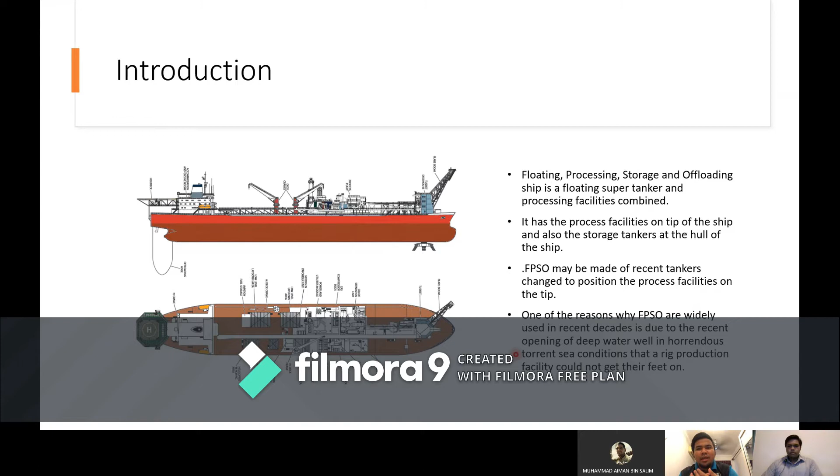One of the reasons why FPSO are widely used in recent decades is due to the recent opening of deep water wells in horrendous torrent sea conditions that a rig production facility could not get their feet on. So in the oil and gas industry, mostly floating production storage and offloading units were converted from single hull super tankers.

Besides that, at the LNG, which is liquefied natural gas logistic chain, where the natural gas is brought back to ambient temperature and pressure, a specially modified ship is used, which is FSRU.

So generally, there are four types of FPSO. The first one is FSO, which is floating storage and offloading. In this type of FPSO, which is FSO, it doesn't have any processing and production. It's just for storage and transportation.

Next is FPSO, which is floating production, storage, and offloading, primarily used in the offshore industry. Next is FDPSO, which is floating, drilling, production, storage, and offloading, in which this type of FPSO has a drilling process. Last but not least is FSRU, floating storage regasification unit.

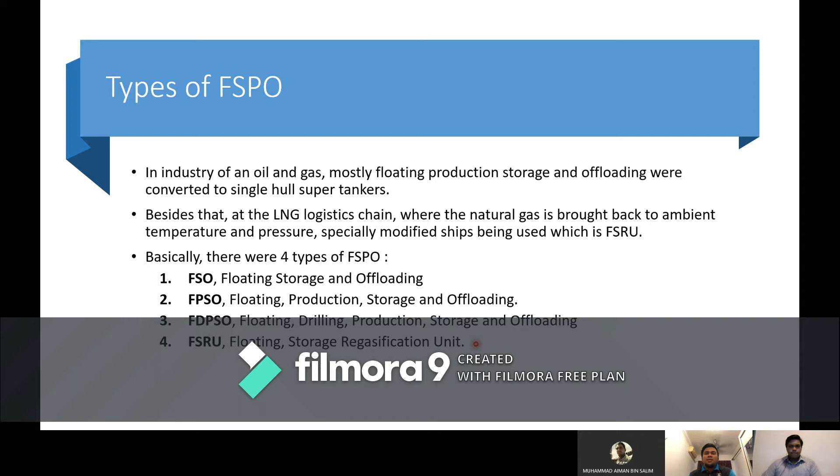So for the FSO, it involves accumulation and storage of oil and gas at sea, as a secondary method of oil and gas transportation and storage, exporting to shore by pipeline or shuttle tankers.

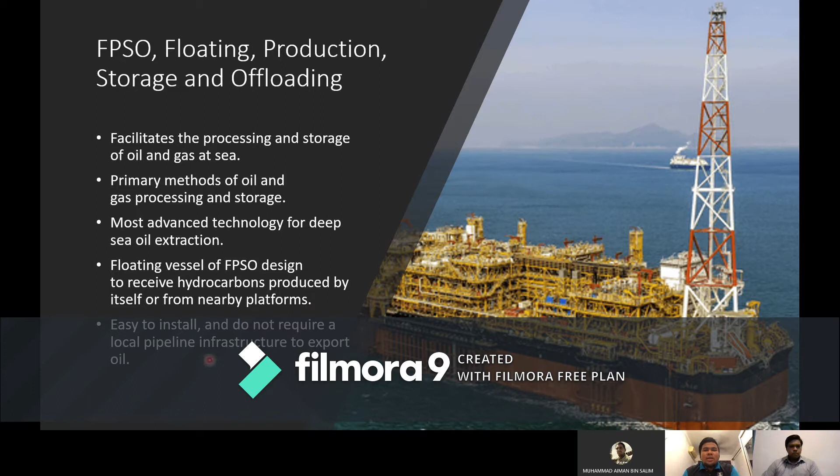For the FPSO, it facilitates the processing and storage of oil and gas at sea, as a primary method of oil and gas processing and storage, using the most advanced technology for deep sea oil extraction. The floating vessel FPSO is designed to receive hydrocarbons produced by itself or from nearby platforms. It's easy to install and does not require local pipeline infrastructure to export oil.

For the FDPSO, the vessel is modified with a modular drill attached to the hull of the ship. Addition of the drilling process allows it to perform nearly all major functions associated with offshore oil and gas production.

Last but not least is the FSRU, a vital component required while transiting and transferring liquefied natural gas, LNG, through oceanic channels. It is a special type of ship used for LNG transfer.

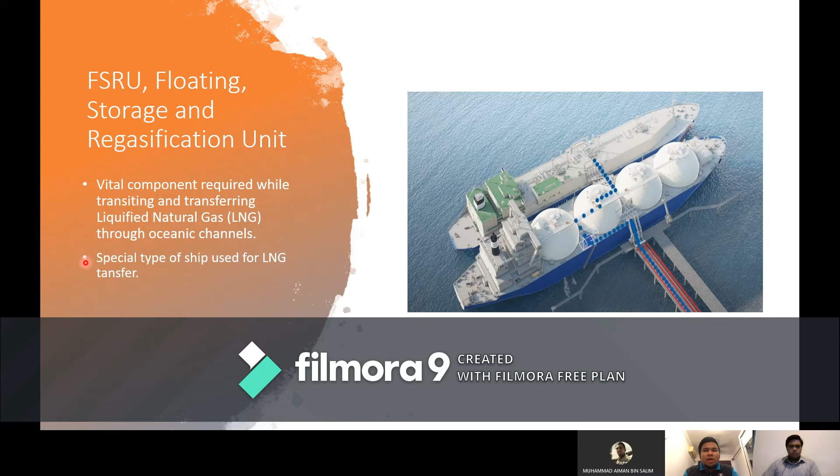We're going next to FPSO in Malaysia. Basically, there are several companies that apply the FPSO concept in Malaysia, one of which is FPSO Ventures Sdn Bhd. Generally, these are the FPSOs in Malaysia.

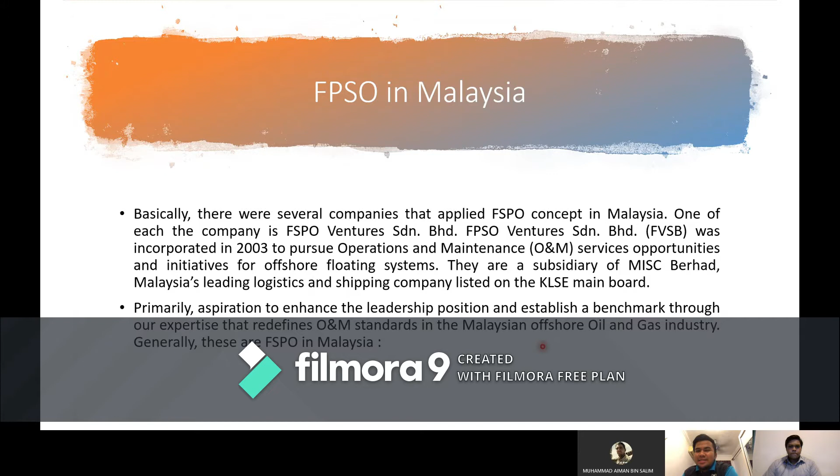The first one is FPSO Kikeh at South China Sea. These are the characteristics and specifications for the ship: weight is 81,000 tons, area 350,000 cubic meters, volume hold capacity 574,560 cubic meters. The process on the FPSO produces the desired product of 2.2 million barrels a year. Manufacture year is May 2013. Location of the ship is South China Sea, and crew on board is 110 members.

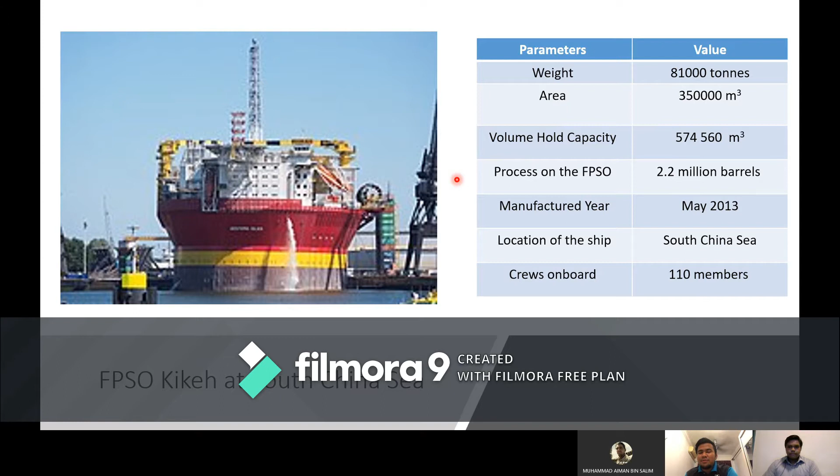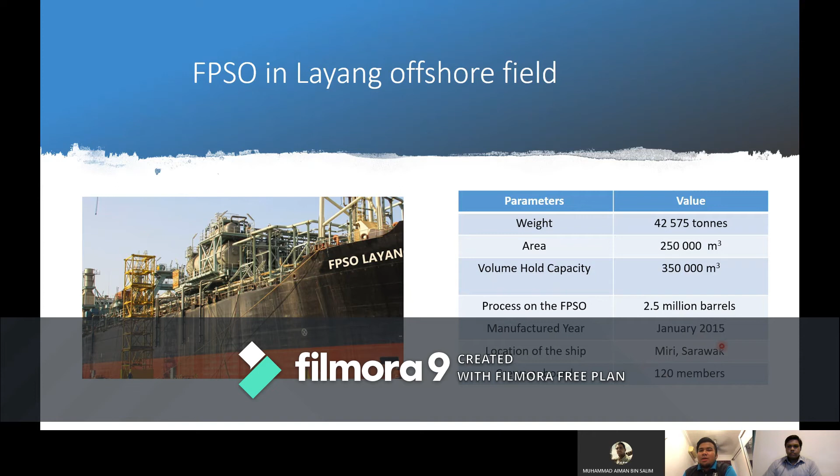Next is FPSO Layang in an offshore field. Parameters: weight 42,575 tons, area 250,000 cubic meters, volume hold capacity 350,000 cubic meters. Process on the FPSO is 2.5 million barrels. Manufacture year is January 2015. Location of the ship is Miri, Sarawak, and crew on board is 120 members.

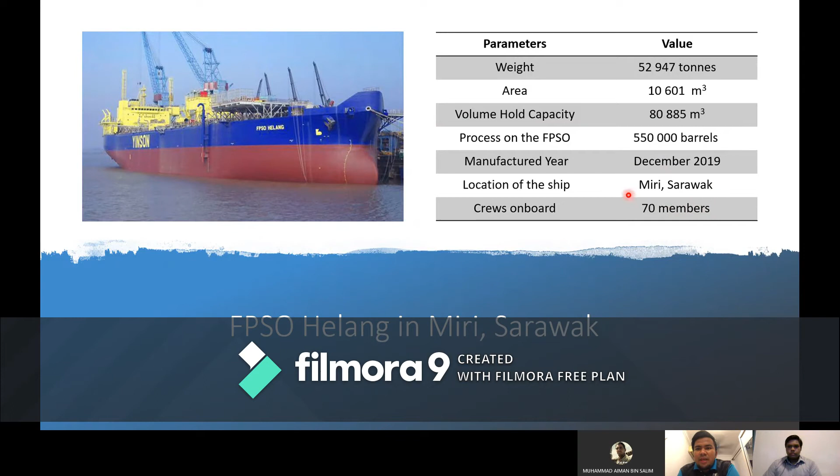The third one is FPSO Helang in Miri, Sarawak. For the specification: weight 52,947 tons, volume hold capacity 80,885 cubic meters. Process on the FPSO is 550,000 barrels. Location of the ship is Miri, Sarawak, and crew on board is 70 members.

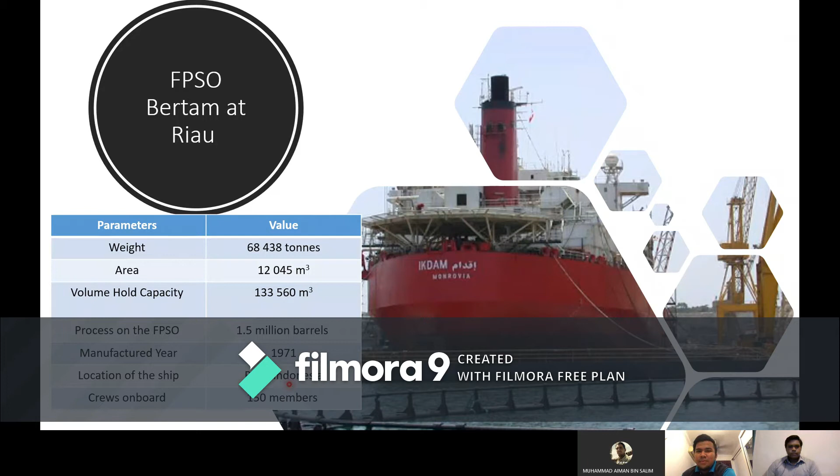Last but not least is FPSO Bertam at Riau. For the parameters: weight 68,438 tons, area 12,045 square meters, volume hold capacity 133,560 cubic meters. Location of the ship is Riau, Indonesia.

My name is Abu Bakar and I will explain about the FPSO design. As we know, the FPSO design has process facilities on top of the ship and also storage tankers at the hull of the ship.

FPSO is usually secured by strong anchor lines attached to the seabed while mooring, and this allows the ship to be anchored and not moved towards an undesired location. There are several designs in mooring, such as spread mooring and turret mooring, and turret mooring is also known as weather vane. These mooring systems are used to keep the FPSO in the best position possible for onloading and offloading.

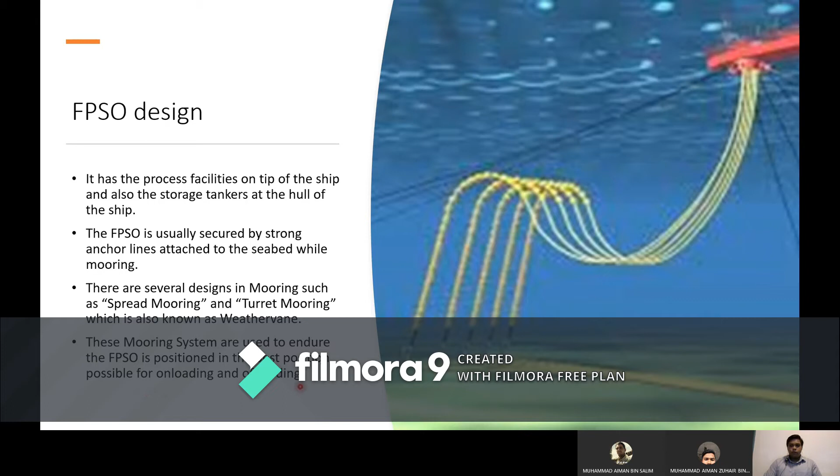Okay, there are four factors to consider in FPSO design features. The first one is hull size. Hull size is the body of the ship, which includes side, bottom, and top side.

Top side is the part of the ship above water level. The main requirements for hull size are configuration, payload (top side weight), storage (space requirements), and deck area. For configuration in the hull, the first one is riser.

We must consider the type of riser that will be used for the FPSO by taking into account riser selection factors. The first factor is platform type, whether it is subsea, permanent, or etc. The second one is the depth of the ocean floor.

We must also consider the weather condition, financial feasibility, and the project timeline, which, if the project is in the long run, FPSO is the best way to use.

The diameter and operating pressure are also important, along with reliability. And the last one is the fluid corrosive properties.

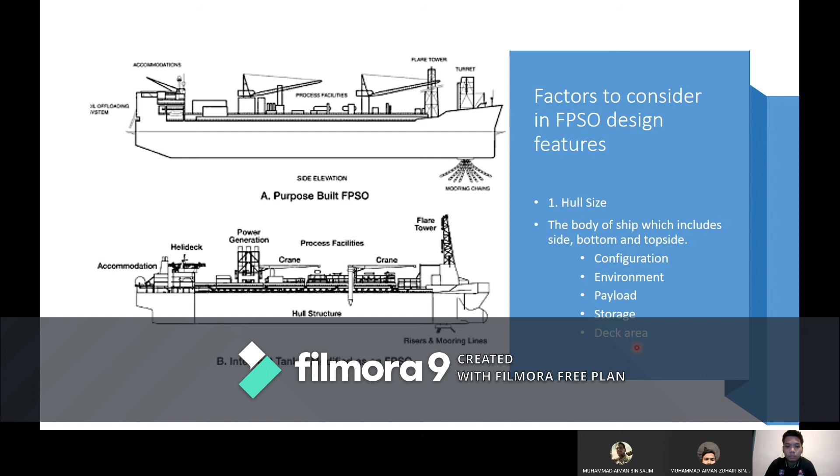So the second factor to consider in FPSO design is the disconnectable FPSO or disconnectable turret in FPSO. It needs to meet all the relevant requirements for trading tankers, including full marine propulsion with crew to operate.

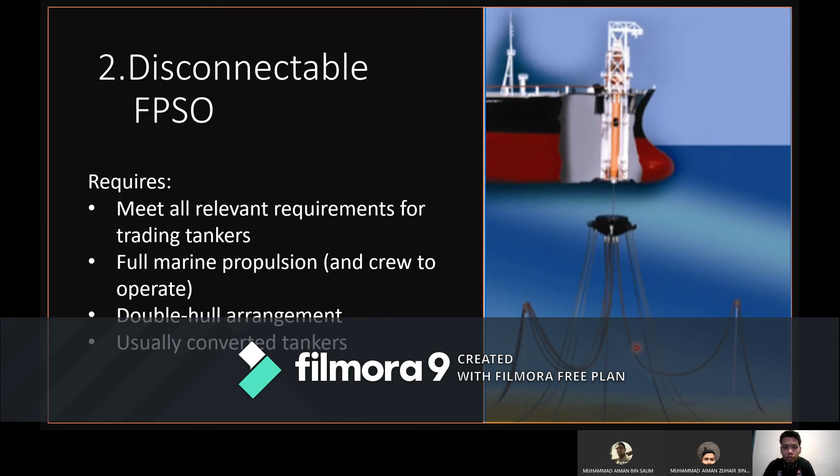It needs to have a double hull arrangement, which is a new requirement after the disaster of oil spills, considering safety reasons. Disconnectable FPSO is usually used in converted tankers to FPSO.

Next, for FPSO converted from a tanker, it also needs the double hull requirement and consideration of design life versus hull condition. This is important due to the limited residual fatigue life of the tanker.

Life extension, which includes partial hull structure replacement - in simpler words, we need to repair the hull - is part of the conversion scope. The third one is condition of the main engine, marine systems, and refurbishment scope.

The next one is project schedule, which is normally faster than a new build. The last one is project cost, which is normally less expensive than new.

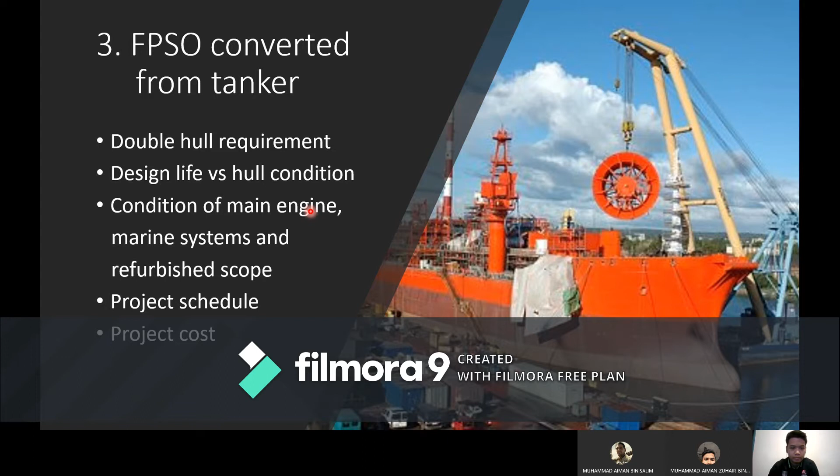Next, these are the advantages and disadvantages of the process in FPSO. As we can see here, the advantages are more than the disadvantages. Let's see the advantages. The first one is it can save time.

FPSO can be connected to any pipeline due to its connection flexibility, while a permanent pipeline for transportation would take time to build and install. It is more preferable to use FPSO, which is free to go from one well to another. It is especially suitable for small wells that would deplete in a matter of years.

The second one is cost - it is cheaper in the long run. Building a permanent pipeline would cost more in the long run, considering maintenance, well completion, and platform decommissioning expenditures.

When a well has depleted and become unviable, the removal of equipment and capping of the well for the abandonment process would spike the cost by hundreds of millions of dollars. FPSO can minimize this as small permanent infrastructure is taken into account.

The third one is safety. FPSO is safer because it can be disconnected from the pipeline and oil wells if anything bad happens in the well or the FPSO itself.

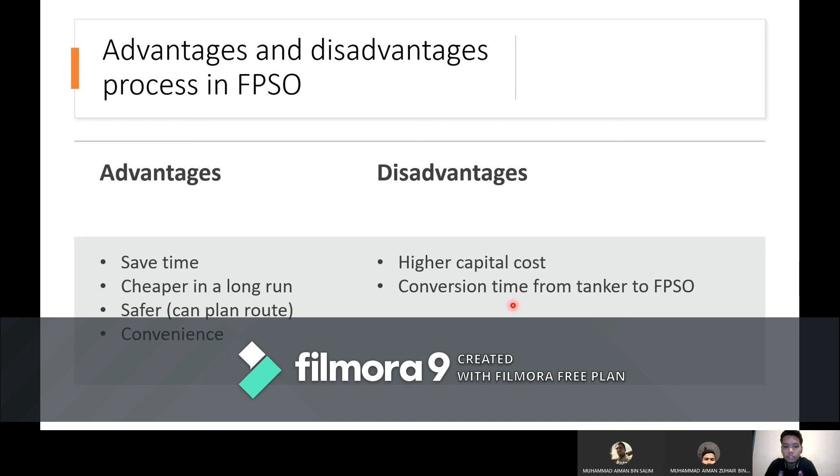The second one is conversion time. To convert a normal tanker to an FPSO, it needs 2 years, but it is still viable. Even though it is still faster than building a pipeline, it is something to consider.

Last but not least, for the recommendation of an FPSO: normally an accident will have occurred in the oil and gas industry if the workers did not take safety precautions.

In Petronas, the purpose of accident analysis is not to accuse or blame the weakest member in the control hierarchy. It is instead intended to draw lessons that can be applied to improve the operation and safety guidelines of the operational process.

A thorough review of the Petronas incident supports a collection of guidelines. In the event of an FPSO incident, they are divided into 4 groups: the first one is technical infrastructure, next is business management, the third one is management and production, and last but not least is government and environment.

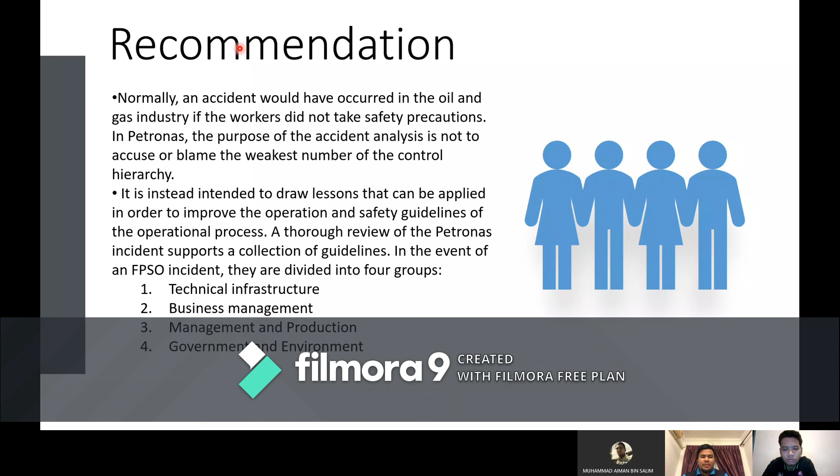For the technical infrastructure, the first one: the operator must strengthen the valve control system, ensuring before production occurs that the general shutdown and general open-up processes follow procedure, so that the valve is not leaking or exposed to high pressure damage.

The second one: other alerts must be added to supplement the computer system, such as installing alarms that can be triggered if an emergency case or accident may occur. Last but not least, provide a reliable backup communication system to avoid degraded functioning and loss of control.

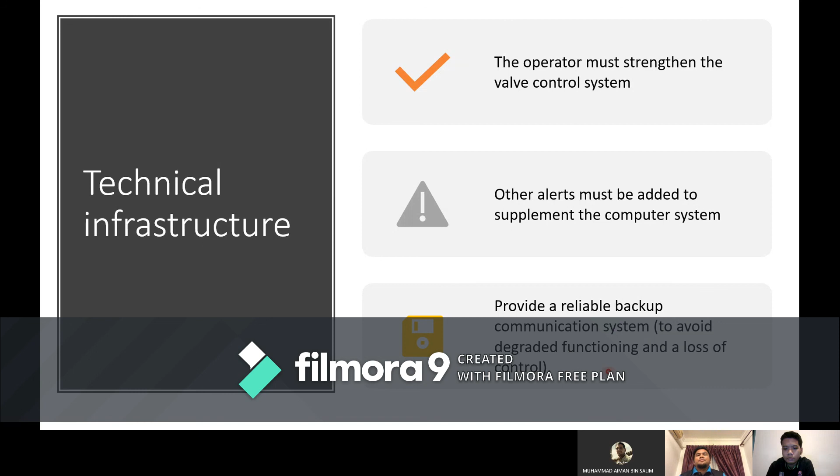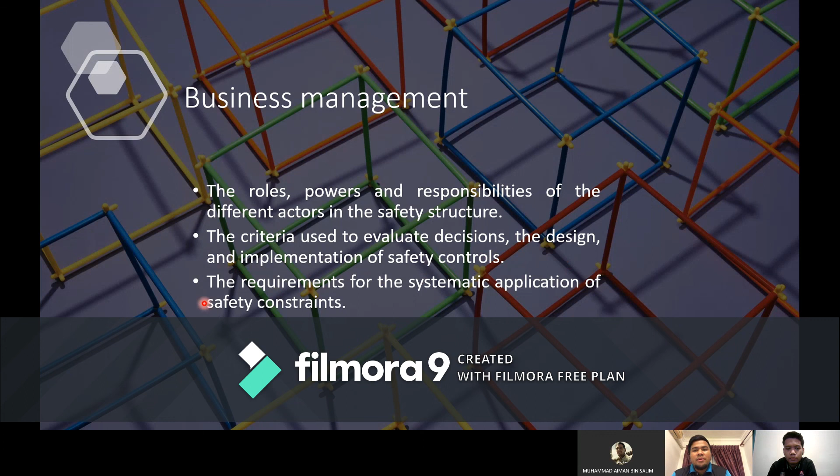For business and management: the roles, powers, and responsibilities of the different actors in the safety structure, the criteria used to evaluate decisions, the design and implementation of safety controls, and the requirement for systematic application of safety constraints.

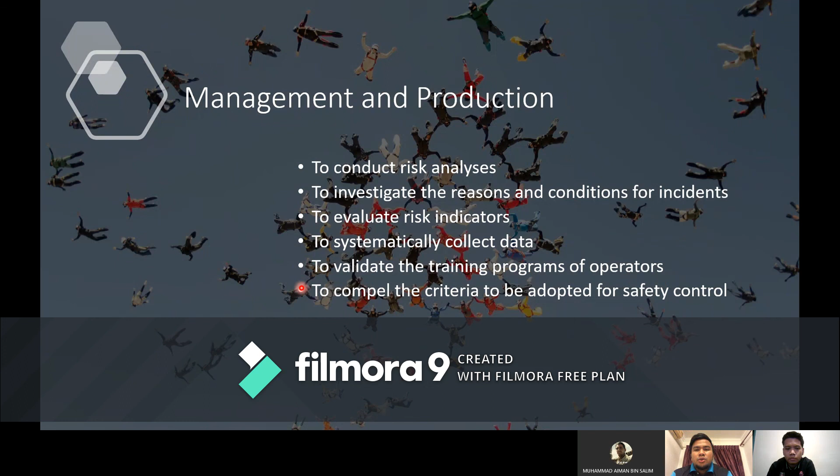The third one, for management and production - recommendations to adapt: first, conduct risk analysis; second, investigate the reasons and conditions for incidents; third, evaluate risk indicators, systematically collect data, validate training programs for operators, and compile the criteria to be adopted for safety control.